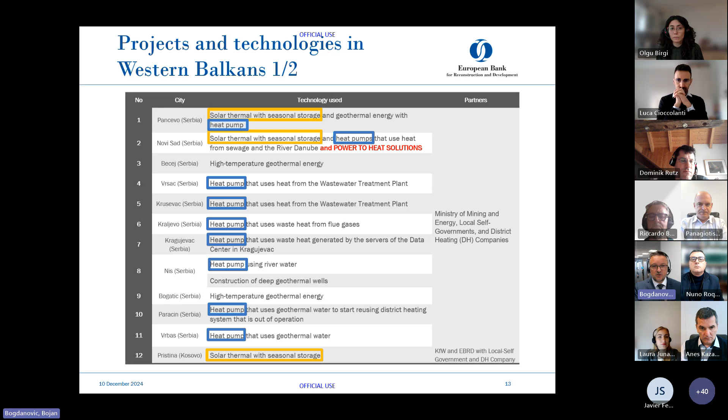And we are also starting now in sub-Saharan Africa. So I don't want to steal the show from other colleagues. I just wanted to make an introduction of how different the solution needs to be. This is why the district heating sector is probably more complex than others, because every city, every district heating system deserves a different solution. As you can see here, in this example, of the cities we are already working on. For some cities, solar thermal is a solution. For some others, heat pumps, but heat pumps also can use geothermal, direct geothermal with or without a heat pump. Also, urban and industrial waste heat.

As you can see here, in some cities we use wastewater treatment plants, and in some cities we use data centers. In some cities we use excessive heat from steel factories. But as you can see, also ambient water from rivers, and you can see this bold and red power-to-heat solution. This is now a very, very important aspect. Some additional cities in the region have different aspects and technologies.

So why did we start with solar thermal, but also with seasonal storage and power to heat? Because negative electricity prices are distorting the market, especially in Southern and Eastern Europe. Governments and businesses were mostly focused on wind and solar, but not enough focused on storage. For instance, in Slovenia, they expect that negative electricity prices will, in 2025, be more than 1,200 hours per year. This is huge. This is a problem. And you can see one example, one year old.

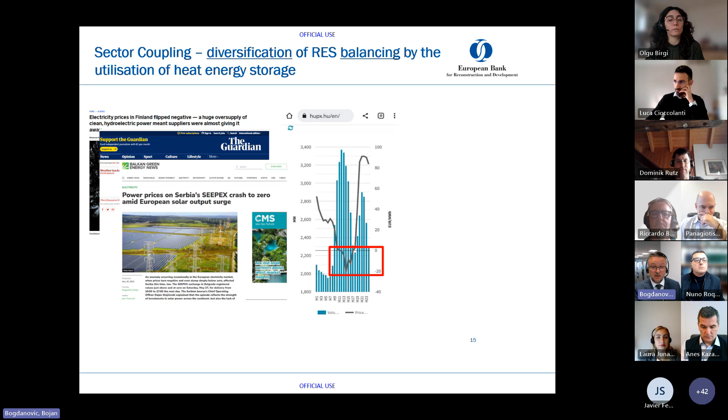So the negative electricity prices are already there. Sometimes they go even to minus 500 euro per megawatt hour. And it's megawatt hours, gigawatt hours of electricity that are sold. So the renewable energy producer needs to pay somebody to take their electricity and needs to pay high, extremely high prices for that. But luckily, in March 2023, the EU issued recommendations for energy storage.

And for the first time, you can see in the title, diversify energy storage. So everybody was speaking about diversifying energy sources, wind and solar and biomass, but energy storage was not in focus. So what is important for us, as you can see here, in this recommendation, a coupling of district heating systems and electricity systems is one of the priorities. And this is finally that the EU put this as a priority. And this is very important for the sector, because by supporting the balancing of wind and solar, we also decarbonize district heating.

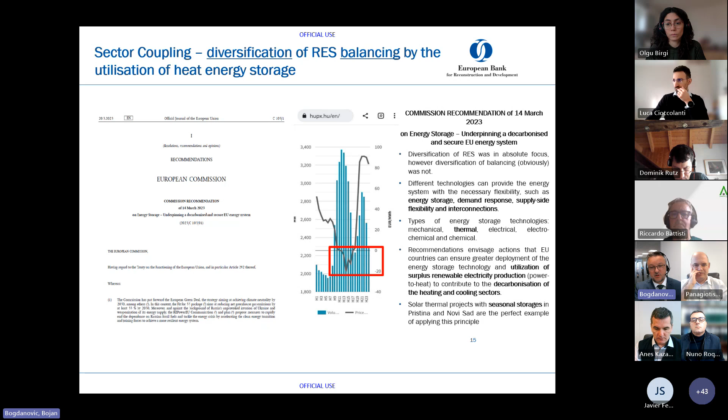And you will see an example, a very concrete one. This is a huge project. We are now finishing the financing part. It will be a 105 million euro project in Novi Sad.

As you can see, it's 850,000 cubic meters of seasonal energy storage, 38,000 square meters of solar, 17 megawatt of heat pump, and 60 megawatt e-boiler. It is also very important that this project is in close proximity of an existing CHP that doesn't have energy storage.

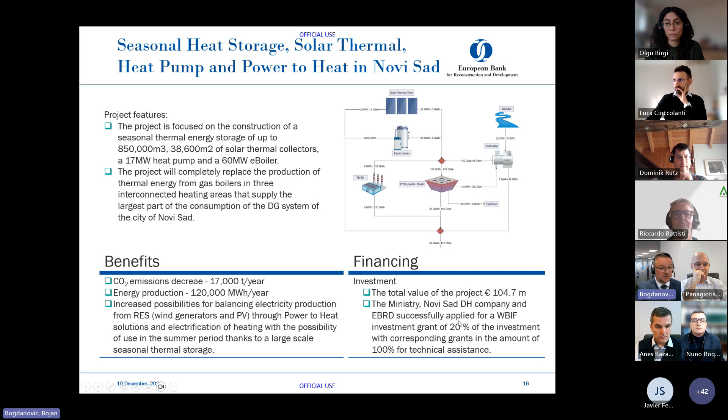But let's go slightly more into tech. So this is how it will work. This is the existing CHP, these two big storages, solar thermal collectors, and the facility.

As you can see, this is the existing system in the city with 3 natural gas boiler plants and CHP. After the project, these 3 plants will only be backup for very short peaks, so practically natural gas for plain heat production will be excluded from Novi Sad thanks to this project.

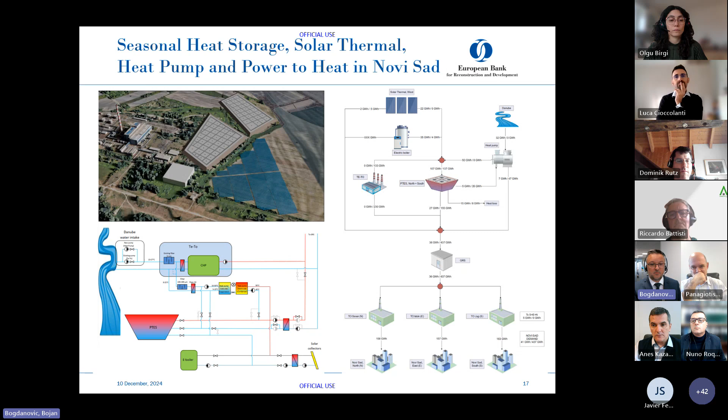Of course there is a big difference between summer and winter regime. This is the summer regime and charging the storage. You can see here, storage will be charged by the e-boiler.

And it is very good for the district heating system because the system will get remuneration just for providing this e-boiler. It will be put into operation with the electricity company and the TSO company of Serbia, and they will pay just for having this boiler available. For this project, it will be almost 1.5 million euro per year just to make this boiler available so they can use it whenever they need to balance excessive electricity.

Also heat, during that process, whenever this is used, it's only 5 euro per megawatt hour. So this storage during summer will also be charged with solar thermal, which is standard Danish technology, something that in Denmark was developed over 30 years. Thank you to colleagues from Denmark for working over 30 years on seasonal energy storages.

Now we have them, and now they are very efficient. We will also use a heat pump to chase cheap electricity. During summer, with the duck curve, whenever electricity is cheap, the COP of this heat pump to charge the storage will be almost 3. So whenever electricity is lower than, for instance, 40 euro, with a COP of 3, you get extremely cheap heat to put into storage.

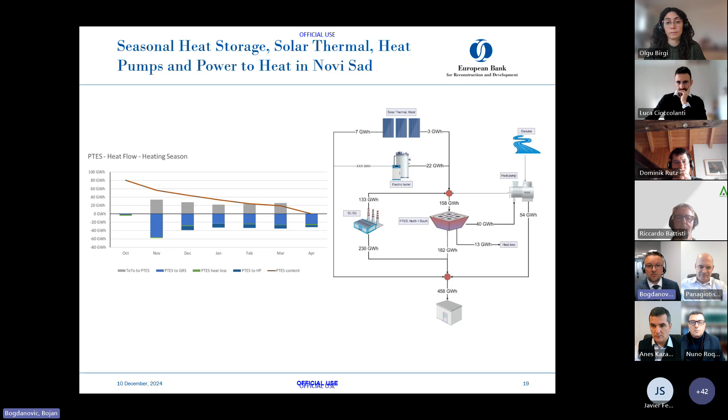Also, during winter, very importantly, we will still have all this energy from the heat pump and e-boiler, but this existing CHP will also utilize this storage as daily storage. So the amount of heat provided to the city will actually exclude the plain hot water only boiler on natural gas. They will not be used anymore.

So of course we are working on replicating this potential. What is good for the area, what do we need to make this project bankable? Land needs to be relatively cheap.

In this case, it's a water supply protected area, so you cannot construct anything or use it for agriculture. You need a district heating pipeline because it's expensive, but it's already there because the CHP is already supplying the city with heat. Then you need high power and voltage electricity supply for the e-boiler and heat pump, which again you have in this location because you have CHP there.

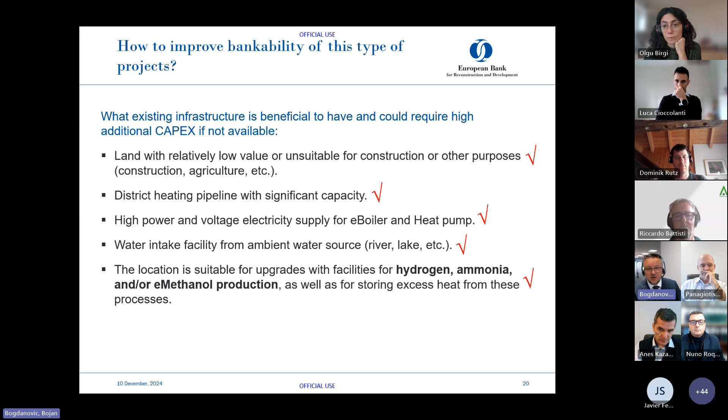Also, this CHP has an existing water intake for cooling this steam cycle CHP. And of course, we are working on upgrading this to an additional level, including hydrogen, ammonia, or e-methanol production, because as you already know, when you produce this you get at least 30 to 50% heat. So in order not to waste this heat, especially when excessive electricity is usually available during summer, we will use storage for it.

Just not to take too much time, to give you another example, we are working on this and it's already advanced in preparation of tenders for works. This is Pristina, similarly huge. Novi Sad will be the largest seasonal heat storage in Europe, I think probably in the world, at this moment, but this one is also big.

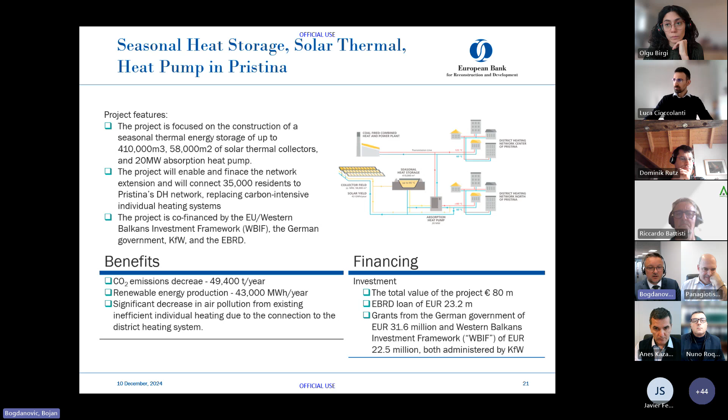So this project is developed in parallel with the EU, KfW Bank, and the German government. As you can see, it's very similar, but in this case the heat pump is not electricity driven. This is an absorption driven heat pump with an existing heat source.

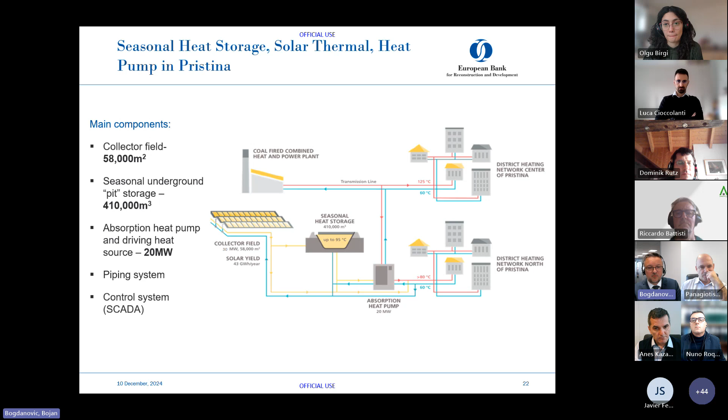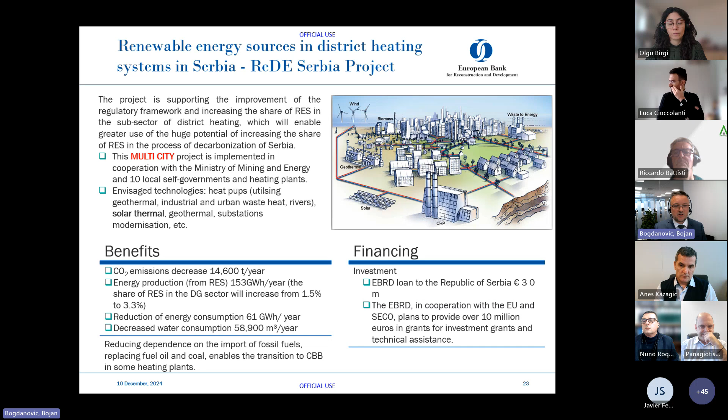Just to briefly mention, in order to support mid and small size cities, we have this multi-city project. In 10 cities, many shown on the first slide, different technologies utilize waste heat from data centers and others. This multi-city concept is important because we need to support not only big cities with big projects, but also mid and small size cities. Multi-city projects are more complex, but as you can see, we go to every city and create a customized solution because every city is different and usually totally different technologies are applied. This is a good example of 10 cities each with waste heat, solar thermal, geothermal, industrial sources, similar to what you already saw.

Just to finish, in order not to waste this precious renewable heat we produce, we need to do more on energy efficiency in multifamily residential buildings. This is the sector with the least results all over Europe, especially in Southern Europe. We haven't refurbished multifamily residential buildings, but we have a model that is tested and works. In 14 cities in Serbia, for instance, we will refurbish 1.6 million square meters of buildings connected to district heating systems. This is important because in some countries we still don't have fully deployed consumption-based billing. This concept is dedicated to refurbishing buildings, but also introducing consumption-based billing, not only on a building level but also with thermostatic valves and heat cost allocators.

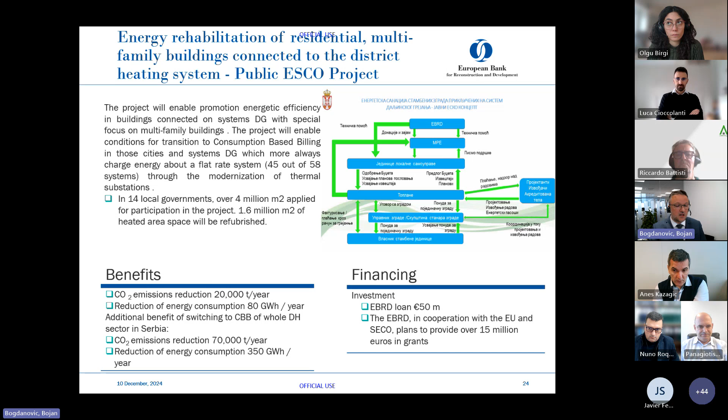The final slide is about what is new, especially for the Western Balkans. The EU provided significant funds for its growth plan for the Western Balkans, but these funds are connected to some conditionalities. I'm happy to say many of them will positively influence district heating. Consumption-based billing is promoted on a flat and individual level, along with introducing CO2 emission trading in the Western Balkans, air quality measures, and a focus on district heating. So very good news for the sector in Western Balkans.

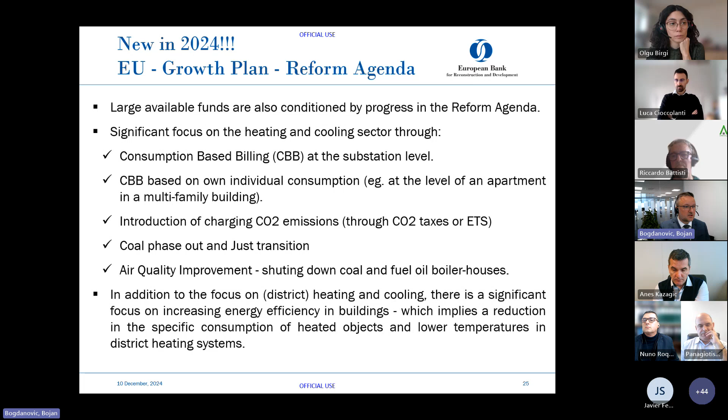Thank you very much again for providing me with an opportunity to present this today.

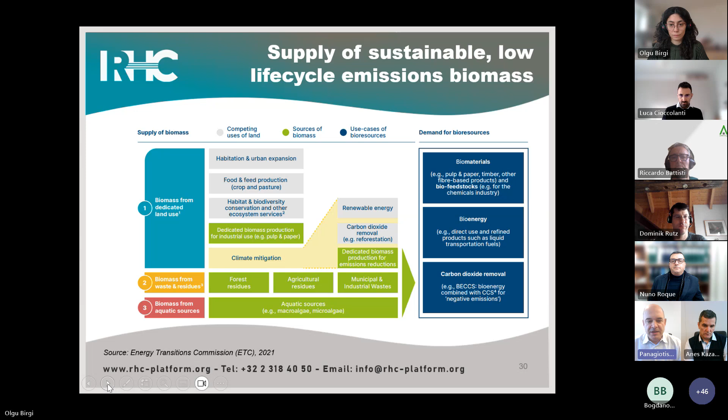The challenges, the main challenge for bioenergy, both for the heating sector but also for the other use cases, is fuel supply and availability. In Europe, we are using a lot of forest residues, but we have reached a maximum utilization of forest residues and available sources. And so the tendency is to use worse fuels, meaning fuels difficult to handle, difficult to collect and utilize, such as agricultural and waste-derived residues.

Then another issue is storage and handling. We have different issues there that have been faced, and there is some development in technology and maintenance, regulatory and policy barriers. This is also an important figure since the regulatory framework is not uniform in all European countries, and this is a challenge. And of course, public perception and awareness in some cases - for example, in Greece, people are afraid of the emissions derived from biomass applications. So it's good to have proven good practices, so that you convince people that this is an efficient technology.

So strategies to overcome these challenges include policy and regulation, technology and innovation - something that Europe invests a lot in, is about advances in technology and advanced technologies. Collaboration across sectors is a good example - we have cooperatives there, and we have energy communities. And last but not least is public awareness and education. Next slide.

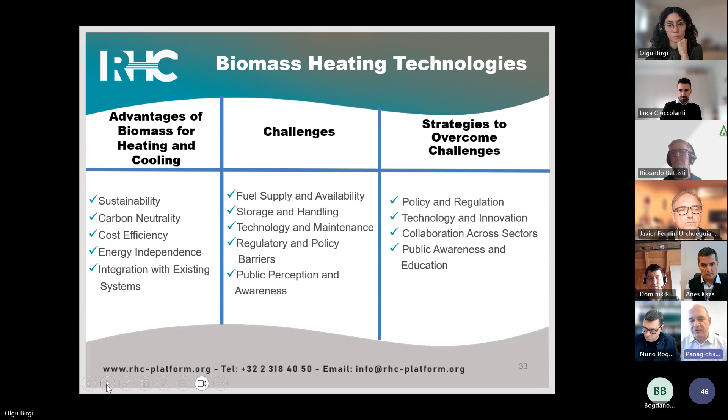These are the general framework I would like to set for the bioenergy, and especially for the biomass heating sector. I will show very rapidly some good examples that we have in Greece, but also in other countries.

Here you can see a plant, a gasification plant from agricultural residues. It's a 0.5 megawatt plant in Thessaly. The main products are biofuels, biochar, and syngas, and it operates quite well in recent years, but it's good to say that it is based on agricultural residues, and this promotes circular economy. Next slide.

We have another example, this is Biopar. This is a bigger boiler, it's a 5 megawatt electric boiler which produces electricity based on ORC. Unfortunately we don't have their heating application, and another characteristic of this plant is that we have imported fuel. It's mostly olive residues imported from outside Greece, and they use it as a primary fuel.

Here is a good example of an energy community. It's ESEC, an energy cooperative in Thessaly, Greece, in central Greece. It operates a pellet plant, providing different quality pellets with a capacity of 1,200 tons per year. This is a good example of how an energy community can act in the bioheat sector.

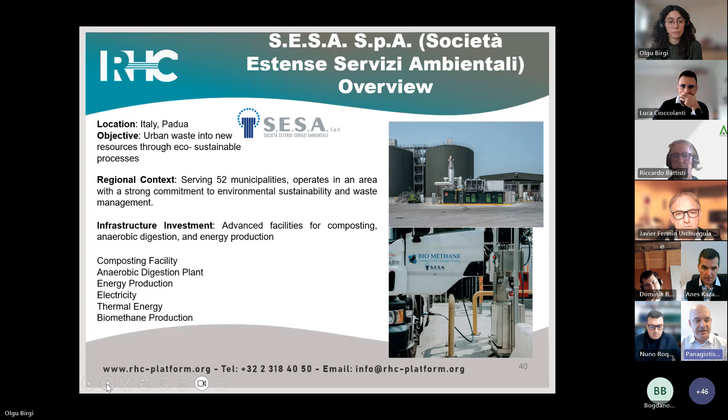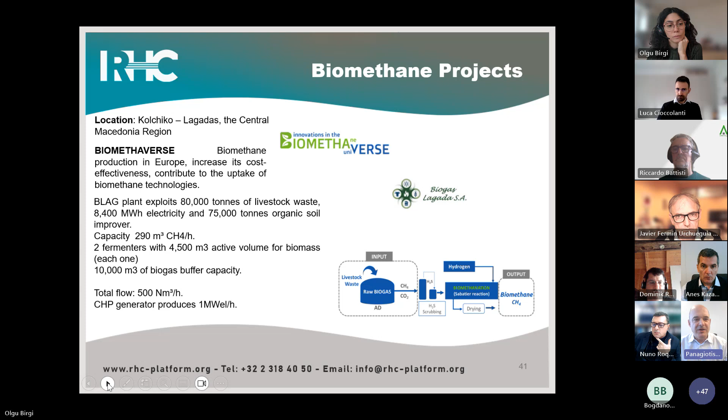With these examples, I would like to summarize the main key points for bioenergy in South Europe: there is an increasing shift from coal to biomass-based energy, mainly driven by sustainability goals. Although bioheat share in district heating is low, we saw the example for Serbia, but for South European countries, district heating is quite low. Investments using locally sourced biomass are rising.

There is also growth in anaerobic digestion and biogas production for electricity, heat, and biomethane. We have circular economy initiatives leveraging agricultural and forestry residues, which I think is quite important. We have collaboration between industries and municipalities, and we have seen different cooperatives and energy communities that can strengthen biomass applications under sustainability terms.

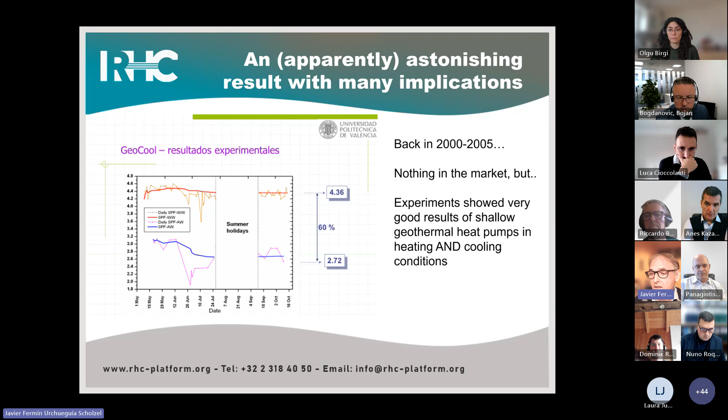Here you can see a COP efficiency of such a heat pump in cooling. Something quite surprising was to see that such a heat pump can work excellently in cooling conditions as well. So if you compare with an air source heat pump, we got from 2.7 to 4.36, the so-called COP, or efficiency, of the heat pump. I think this was very good news to see that also for cooling, heat pumps and geothermal could be a good solution. From that on, we started to have projects here.

I just put some figures here in my slides, just to see that from 2005 on, there was a lot of projects in buildings, in decentralized buildings in Spain. These are just some examples.

One very important message here is that hybrid solutions are key for Spain. So you don't ever see only a heat pump or shallow heat pump system alone. You see a solar heat pump, with solar, with heat pump, or biomass with heat pump, or also air source and geothermal heat pumps working together, because profitability and efficiency of the system has to go hand in hand with also the capex question, how much it costs to put such a system into operation. Often this balance means using not only one technology, but several technologies in combination.

Here you can see even some official buildings that were quite large systems back in 2005. Here in Spain, regulation was a key point, and the RES directive for 2009 was a before-and-after milestone, in the sense that heat pumps started to be recognized as a renewable heat source across institutions in Spain, and also got for the first time into the plans of governmental institutions and associations to start looking at heat pumps. We also see barriers here, but in any case, research in Spain was very active.

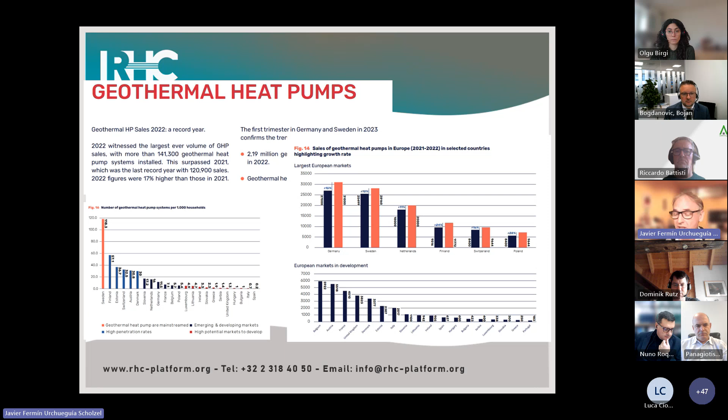So what are the real barriers? I'd like to go more in depth on that, because I think these are the key points for us and how we can really promote this. The first speaker did make a very good comment here: the question of storage and sector coupling will be key.

We have an extremely gasified heating sector in Spain, so we have to compete with a very cheap type of energy source, and we want to substitute this energy source by electricity or biomass, which poses a lot of barriers.

If you see the broad figures in Spain, electricity geothermal plants are not there, although there is potential in the south of Spain, in the Canary Islands. There's a huge potential there. We have only 3 plants with direct use, as we saw in the slides.

This is a little outdated, but we have less than 12,000 geothermal buildings in Spain from many millions of homes or buildings that are really with other types of heat pumps or air source-based heat pumps. If we look at the planning, we see no plans from the government to really deploy this type of system, which is a first barrier.

We have no commitment of institutions towards this type of new solution. You see also the barrier, and I finish with this: we can conclude that the market in our country, Spain, is well below its theoretical potential, even according to nowadays European standards.

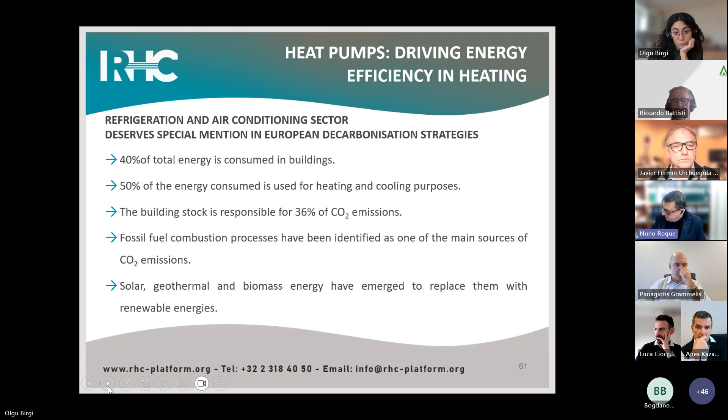In Portugal, we have been trying to use some instruments like incentive programs, but there is a great interruption on these measures. There's a lack of financing from the European Union, and the budget situation in Portugal is not good. So there's a lot of interruption about the chances to use public financial incentives.

We have been using some facilities on VAT, and this year all the goods and services concerning transactions with heat pumps have a rate of 6%. It's the lowest rate that we have in VAT.

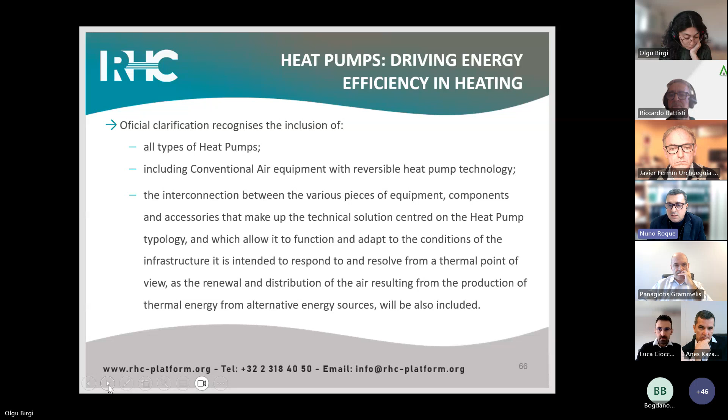All types of heat pumps are included, especially those we need at home. In Portugal, 90% of transactions are heat pumps with air source. They are the most part of the equipment sold in Portugal. This facility in VAT is for all kinds of heat pumps: domestic, commercial, services, and industrial.

But this measure will only run to the middle of 2025. This is a transitory measure. So after July 2025, we won't have this facility, and the rate on VAT will be 23% again.

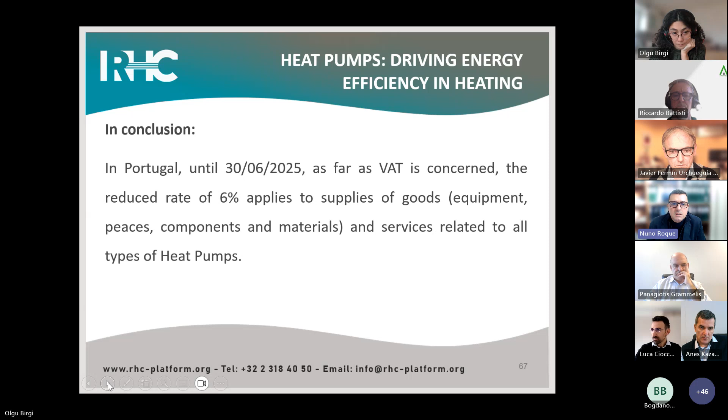Well, about electricity, for large families and for low consumers, we have a low rate of VAT, but for the general consumers, the VAT is 23%.

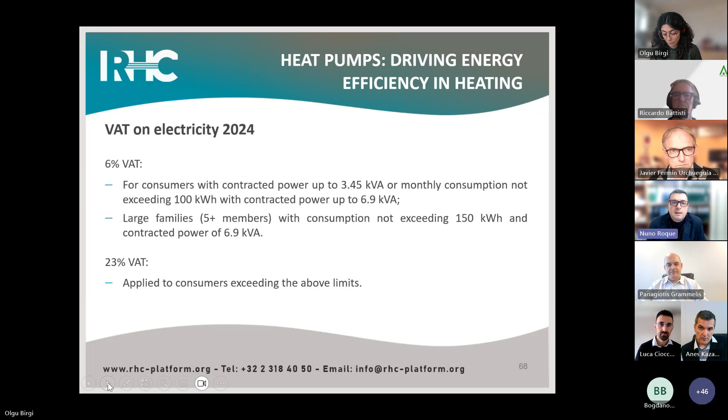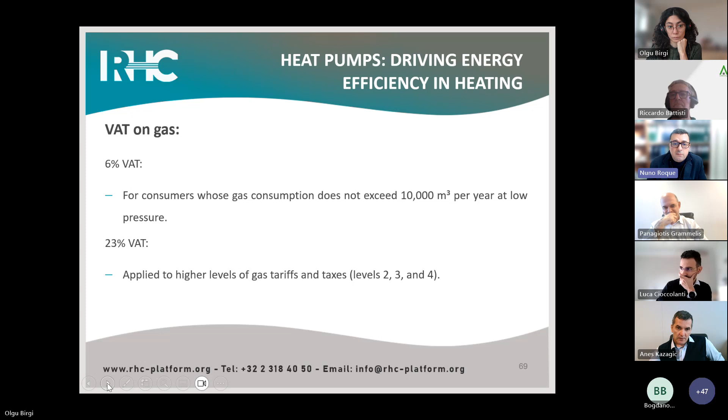On gas, it's the same way: we have 6% for lower consumers, and 23% for the general tariffs and consumers at higher levels of consumption, which is the general tax.

Next year, we'll have the drop of the tax on VAT for electricity. So we'll have 6%, but only for lower consumption and for large families. For the general activities, services, commerce and industry, the rate will continue to be 23%.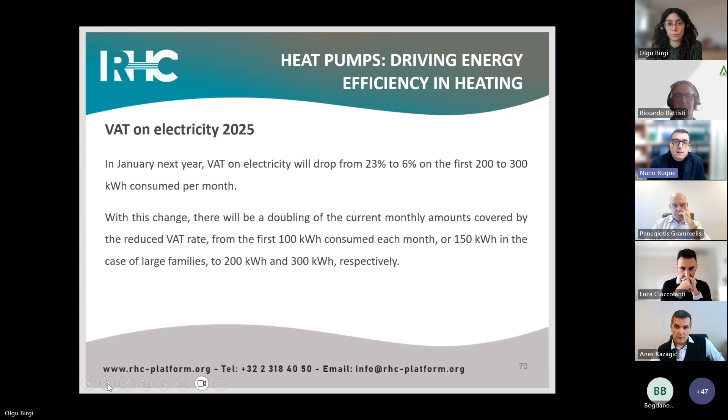Why in Portugal things are not so good in the last years, 23 and 24, with the increase that we have been seeing on heat pumps? Because this equipment is very expensive. It's not easy for families to buy heat pumps and to bring this solution instead of equipment with gas, for instance.

On the other hand, the inflation rate in Portugal, as all around Europe, was very high. Now we have 4% at the end of last year and beginning of this year. The inflation was 4.3%, and in 2022 it was 5%. So the expensive cost of heat pumps and inflation, with problems all along the business chain, gave new difficulties to the selling of this equipment.

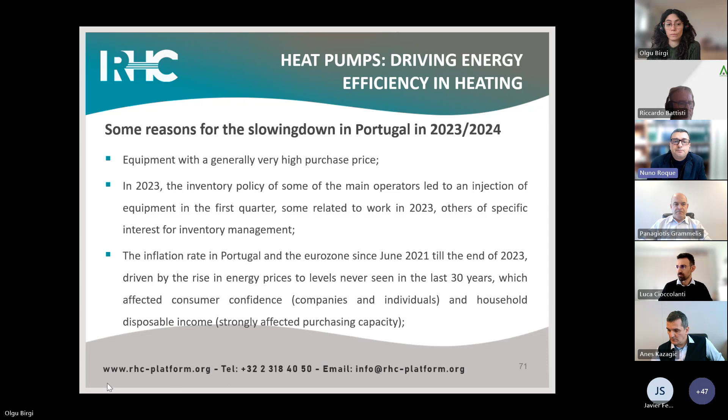So families, but also all the small and medium enterprises, have been facing a lot of difficulties to purchase this kind of product. On the other hand, the end of teleworking and the coming back to companies meant the issue of comfort at home didn't help the selling of this equipment, as we saw in 21 and 22 after the pandemic period.

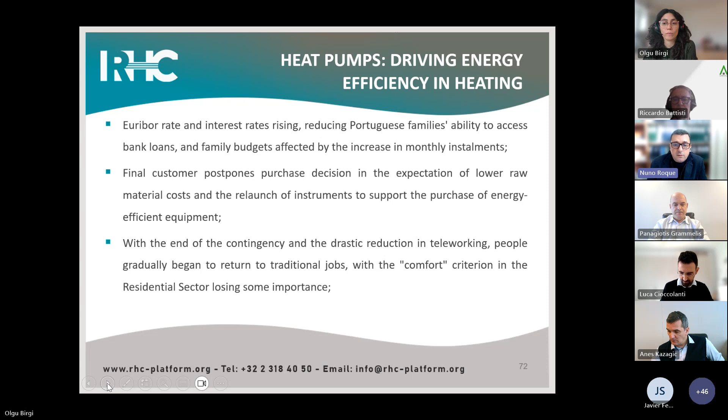Well, we have talked about the difficulties in the public financial incentive programs, the limited scope of the recovery and resilience program too. We haven't been seeing a lot of structural funds in the last years. So the context is not very favorable to improve the purchase of these expensive equipments in Portugal. It's maybe a reflex of other countries too.

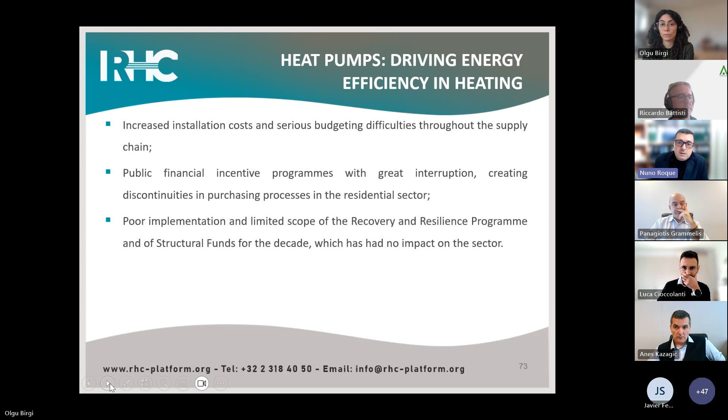So we know that there is no future in fossil fuels. We have to change to renewables. In Portugal, we are doing that on production and on consumption. We have to decentralize the production of energy and connect the production to the consumption of energy in buildings and at homes.

But for that, we need the technology, which is excellent, everybody knows, but we need government action. We have to create the conditions if we want to accomplish facing the exigent challenge targets that we have ahead. We have to go along with the political goals in energy and environment, and we need government action. We have to create favorable economic conditions, and it means we have to use legislation and regulation to adopt these competencies of heat pumps.

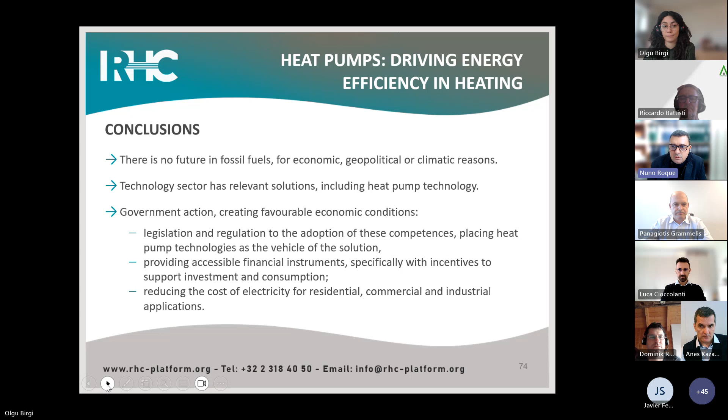So this is a little bit of the outlook that we can give about the context in Portugal concerning heat pumps, and I'll look forward to any questions that you can put ahead. Thank you so much.

Thank you, Nuno. So you all more or less mentioned the topic of district heating and cooling, which, as I was saying at the beginning, is really a cross-cutting point, because it's not a technology, but more like a solution. So I will give the floor for the last presentation to Anes Kazagic to talk about district heating and cooling and how it can foster the introduction of renewables.

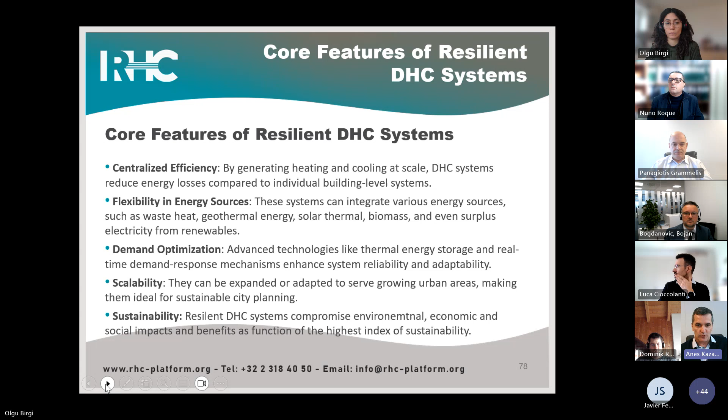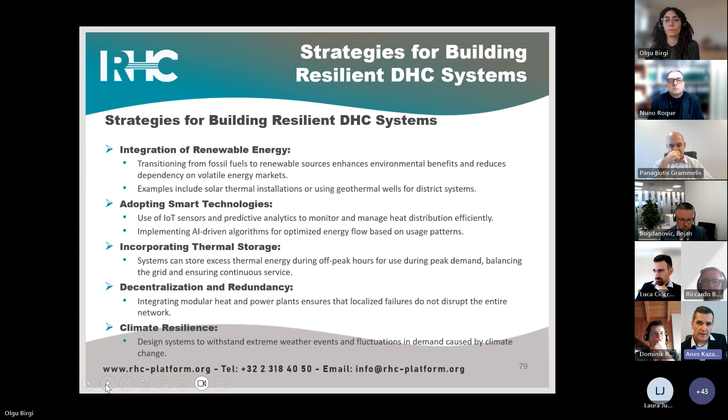The ability to incorporate thermal storage is also crucial to provide optimal dispatching of thermal energy, or electricity and thermal energy if we talk about cogeneration district heating and cooling systems. Also, decentralization and redundancy is very important for the safety and security of heat supply. And climate resilience is also an important strategy. We evidenced the crucial importance of this resilience during the last extreme weather conditions that affected systems across Europe.

To conclude about the benefits of resilient district heating and cooling systems, we can summarize them as reduced carbon emissions, enhanced energy security, cost effectiveness, and support for urban development.

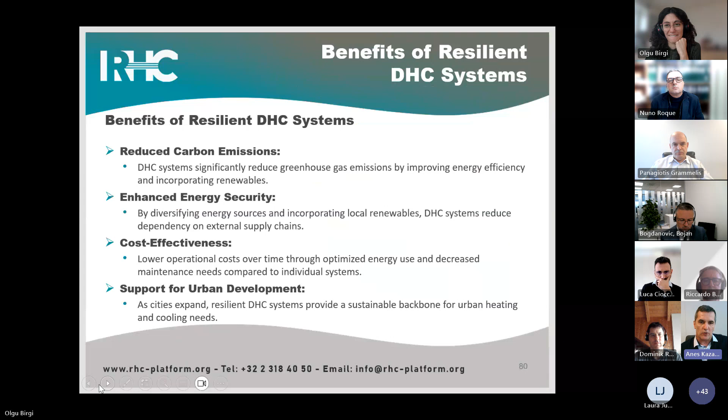So I'm now going to talk about this case study from our country, from Bosnia and Herzegovina. My company, the Power Utility of Bosnia and Herzegovina, operates one of the largest district heating systems in the country, but also in Southeast Europe.

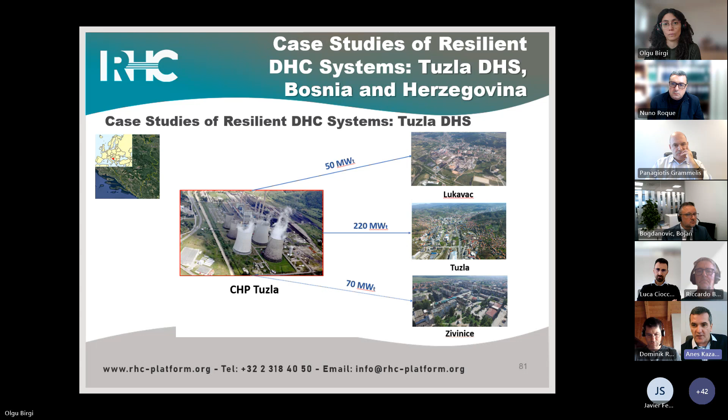It is the Tuzla district heating system. It is in the heart of the coal region, one of the largest coal regions in this part of Europe, the Tuzla coal region, and that's why the transition of this district heating system is challenging compared to other examples, because we need to provide, in parallel, a socially just transition of both the power and heat sectors in this case.

So we start, of course, from the planning. We planned for this district heating system by introducing and changing the heat technology mix. For this first phase, we already started to implement classic heat pumps as a single house solution. We also started using biomass for co-firing in our cogeneration units that supply this district heating system. Also, we started planting short rotation coppice and dedicated energy crops to support the feedstock for the biomass co-firing of existing cogeneration units. And we also plan daily heat storage on the site of the power plant that supplies heat to the district heating system.

For the next phase, we already developed some solar thermal solutions, both centralized and distributed, and we want to add bioenergy solutions, waste to energy, and start to prepare the project of deep geothermal, which we are already preliminarily investigating in this phase. As a final touch for the final phase, we would like to implement geothermal and add it to all those solutions implemented in the first two phases.

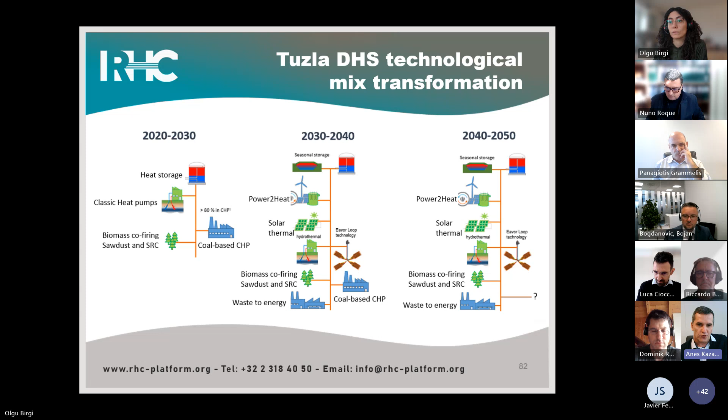So on this slide, we have some examples of already implemented projects and some projects that are at a high stage of development and preparation for implementation.

As I already said, we implemented biomass co-firing in our two cogeneration units in Tuzla power station. We currently use between 5 and 10% of sustainable biomass mixed with the basic lignite used in these cogeneration units, with a tendency to increase this percentage, because in the previous period we tested first on lab scale, then on large scale, up to 20% biomass co-firing on those units.

We also developed, in cooperation with the EBRD bank, one of the dedicated biomass cogeneration power units on the site of the existing power plant Tuzla. It will be 25 megawatts electric combined with 65 megawatts thermal energy for supply of the existing district heating system in part of Tuzla city.

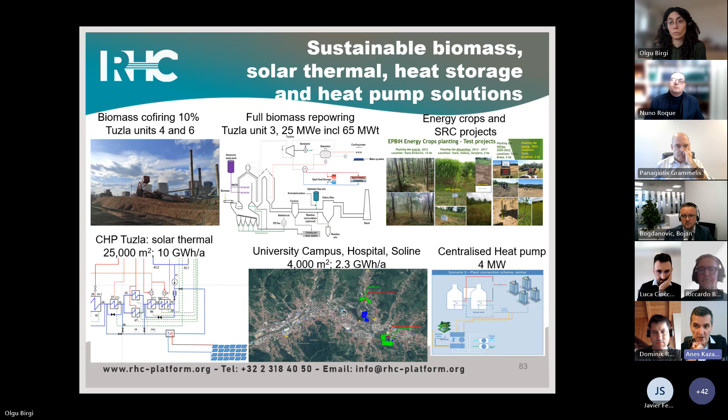So it is actually a summary list of ongoing projects. We currently use 70,000 sustainable tons of sustainable biomass in our cogeneration units, also for the supply of heat for the cities.

Then we are in the final stage and will finish the project study of the dedicated biomass cogeneration unit in Tuzla by the end of the year. Also, EBRD supported our plantation of short rotation coppice on former coal mine landscape.

We already have some subsidies for individual consumers for heat pumps from the city of Tuzla. Daily heat storage is planned at the power station of Tuzla, while 2 sites for seasonal heat storage are under consideration, again in cooperation with the EBRD Bank.

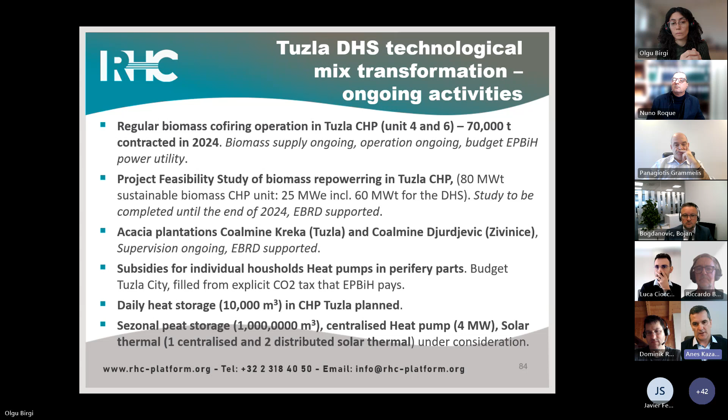So to conclude, there are of course some challenges, but also solutions. We have evidently high initial costs that can be compensated by long-term energy savings. Public awareness is crucial—some of the speakers already spoke about that. Educating stakeholders about the benefits of district heating and cooling systems fosters acceptance and participation. And of course, we need to overcome some regulatory barriers, in cooperation with policymakers, to create a supportive framework.

So as a future outlook, we really need these resilient district heating and cooling systems for sustainable cities and modern urban infrastructure in Europe. So that would be all from my side.

Thanks a lot, Anes. You already mentioned it exactly at the end of your speech, the importance of awareness at local level of all the stakeholders. And of course, this is also connected to acceptance, which perfectly leads us to our last presentation by Luca Cioccolanti about the role of social science and humanities in renewable heating and cooling.

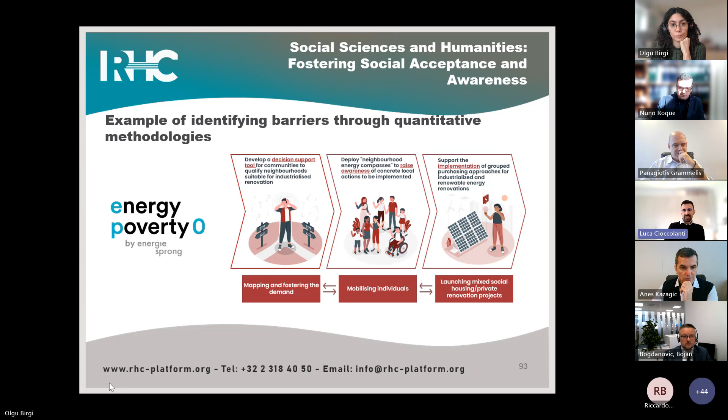Next slide, please. This is just to show how the supportive tool for evaluating neighborhoods could work. It aims at evaluating the area by providing a global vulnerability index of the neighborhood, taking into account several aspects ranging from the educational level of the people in the area, the unemployment rate, and the age of the people living there, in order to understand the vulnerability of the population and support the retrofit of that part of the population.

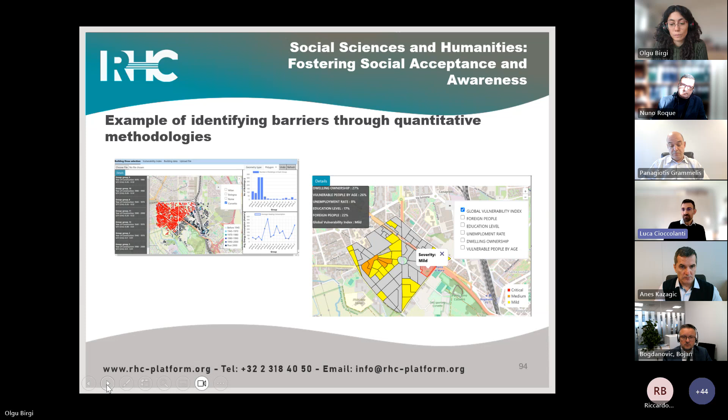Next slide, please. The second and last example of a project refers to community engagement. This was performed within the SuperHero EU-funded project, coordinated by an Italian consultancy company, which aims at developing innovative financial instruments by increasing community engagement in performing energy efficiency measures or the uptake of renewable energy in supermarkets or retail businesses.

This project was implemented through some successful case studies, some of them performed in Italy at NaturaSì organic supermarket, in particular in shops in different locations in Italy. It actually involved the community through a crowdlending approach, identifying different interest rates for investors, with higher interest rates for those closer to the market, so from local communities moving outward to other citizens or interested investors.